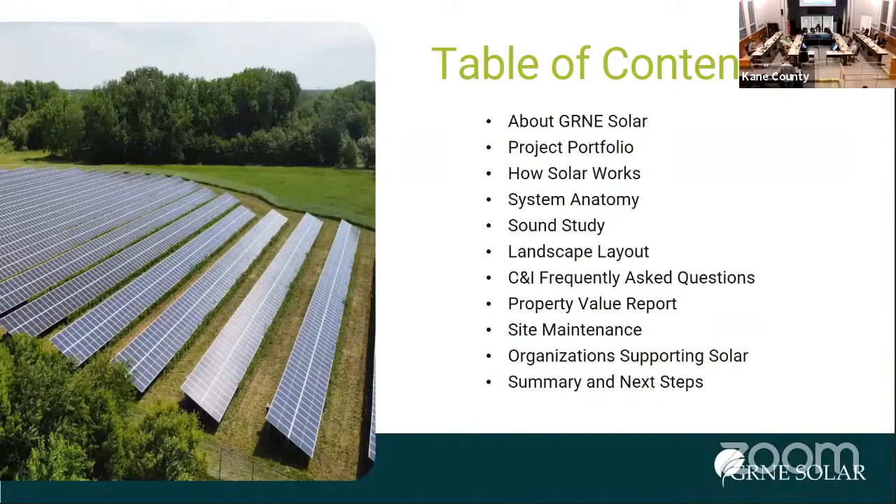I mentioned I'm with GRNE Solar. Next year will be 10 years in business, which is very exciting because although that doesn't seem like a long time for a company, in the solar industry that's an eternity. We are based in the Midwest, with offices in Illinois, Indiana, Iowa, and Nebraska. We operate all the way from the residential sector, putting solar panels on people's homes, up to utility scale projects such as this with governmental entities and municipalities. We do O&M for the life of the service for the PPA agreements we're proposing with this product, and we've built a team that is well-versed and known as experts in the industry, speaking at different conferences or panels to make sure people are educated on what solar is.

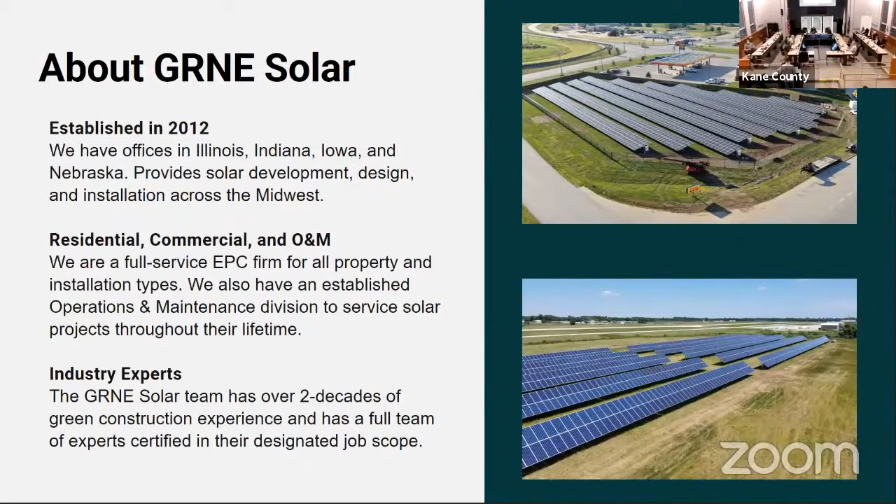The two projects we've done nearby are the Kendall County project and the Fox Metro project. They are almost identical in scope to what we're talking with Kane County about here. These were completed last year, and these fields are operational and are currently saving money for Kendall County and Fox Metro as we speak.

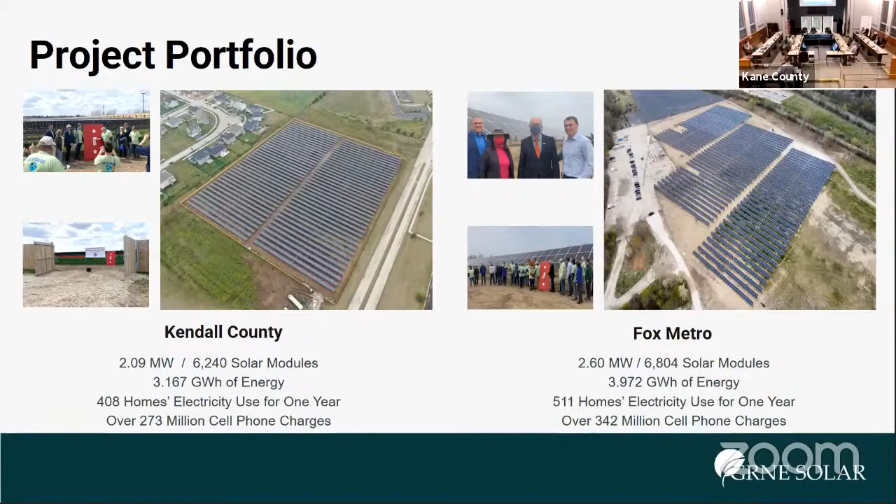Here's a little bit of a portfolio of other projects we've done. As I mentioned, we focus on the Midwest. This project is in Arlington Heights, Illinois, for a private customer, but we've done this type of project for private customers, public customers, and all different entities in between.

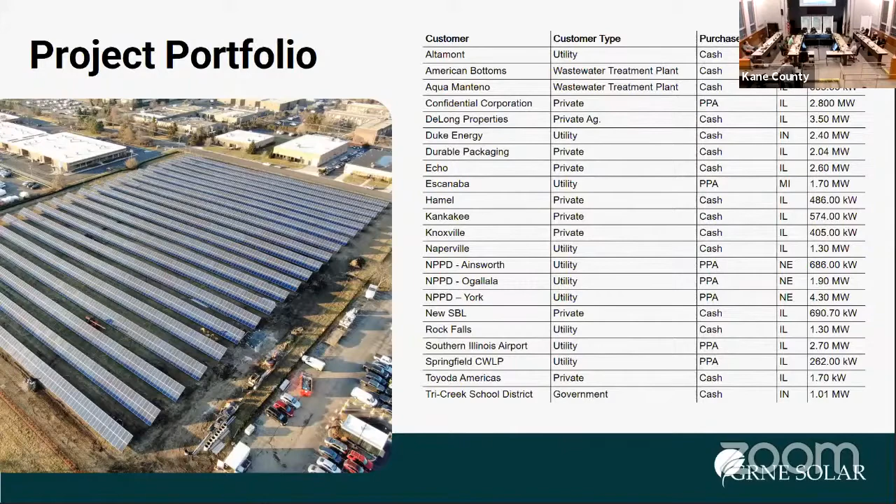One thing we always like to take time to do is step back and explain how solar works. A lot of people know about solar or have some idea of how it works, but it's always good to set the ground level. In this example, you can see solar panels on the roof. Solar panels can really be located anywhere as long as they have direct access to sun. The sun hits the solar panels and knocks around electrons, making energy.

That energy is created in what's called DC, direct current energy. That comes down into step 2, to an inverter, which then changes that direct current into alternating current. Most of the homes we live in, including this room, run off alternating current, so that becomes usable energy. That goes into your existing electrical panel and is used at your home for lights or other loads. Any excess energy is then pushed back onto the grid and goes back to ComEd. So the power produced at your home or building is used there, and any excess is pushed back to the grid where you're getting net metering credits from the utility.

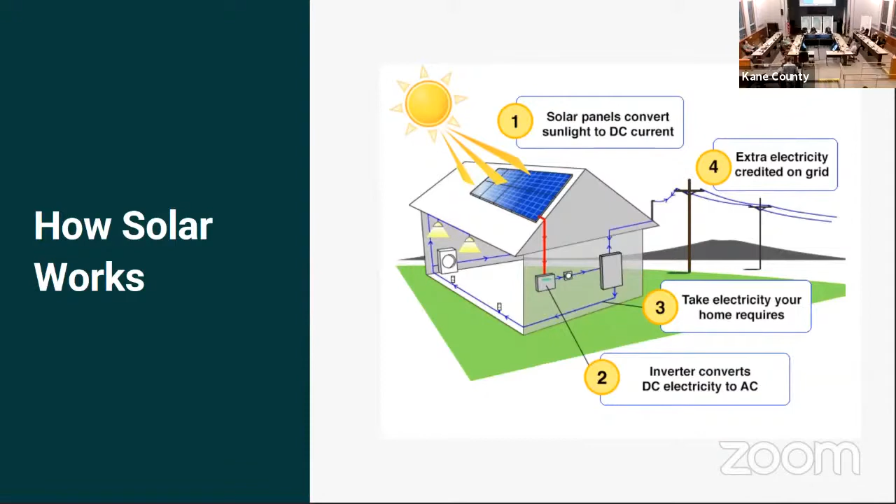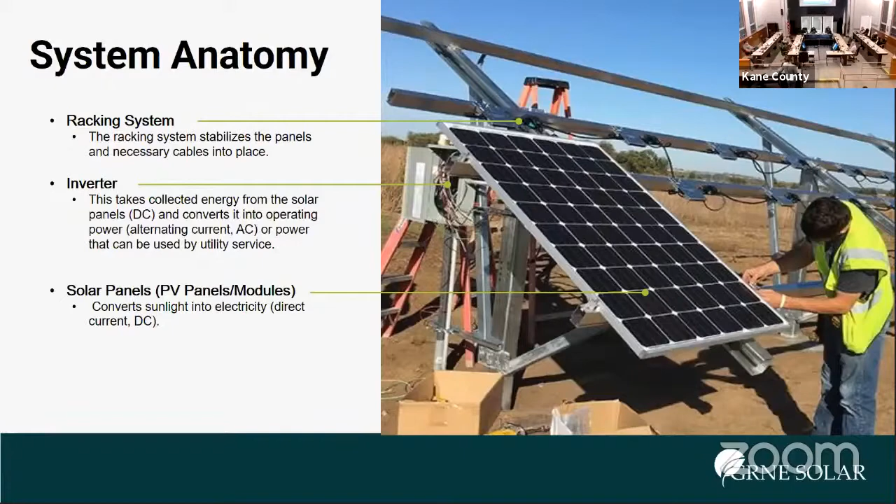Here's a look at what a typical installation might look like. First, you'll see the racking in the back, made of steel and aluminum—that's the support structure. The inverter here, as I mentioned, is kind of the brains of the system; that's what converts DC to AC. Then the solar panel here is located with direct access to the sun, letting the rays hit it, absorb that light, knock around the electrons, and create the energy that becomes usable.

Dissecting a solar panel to see what's inside of it. I actually brought one today. If anybody wants to see one up close, it's in the back of the room. Feel free to stop by and check it out.

There's an aluminum frame on the outside, a double pane layer of glass, the solar cell itself, which is made up of sand, silicon, and ingot, and then a glass protection on the back as well. A junction box protects the wires, and the electricity that runs through those leads into the existing electrical service of your home or building.

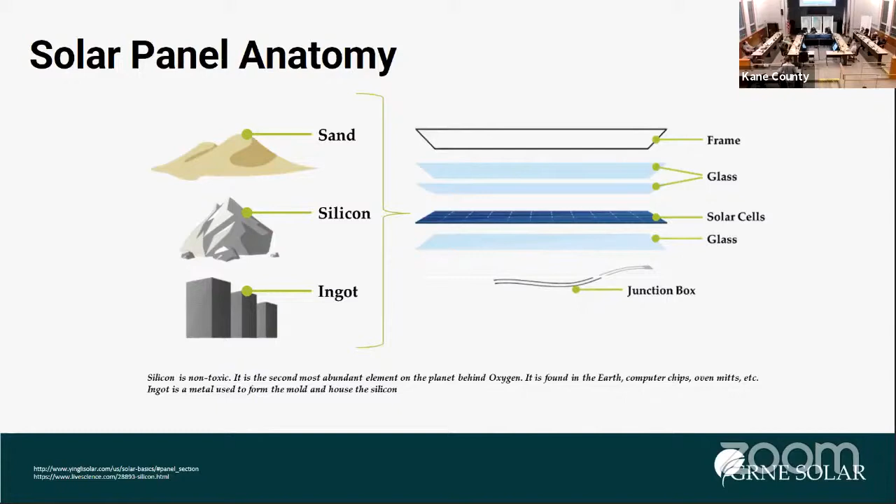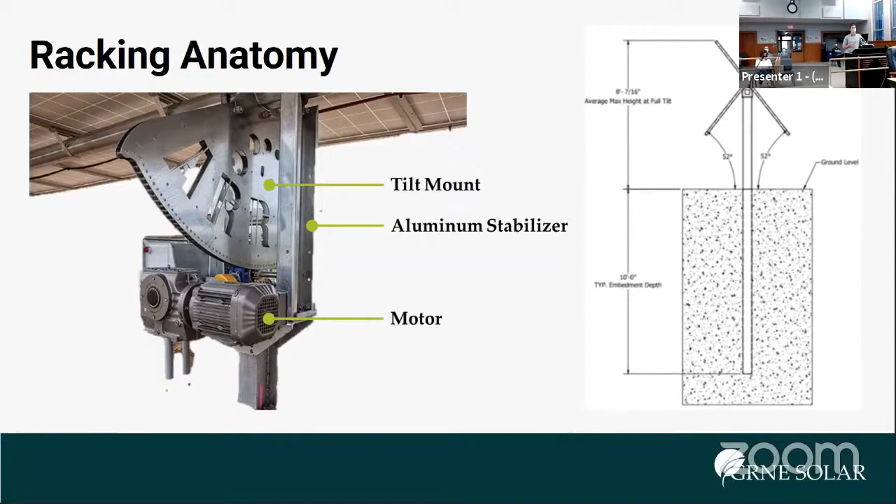On this project, there will be 16 inverters spread throughout the array—that's what's planned as of now. 16 of these white boxes. They're about 2 feet wide and 3 to 4 feet tall. They'll sit inside the array, mounted on the racking structure.

Any other questions on the inverters? Great question—is there any sound that comes from them? That's a great lead into the next couple slides, so I'll answer that as we move forward. Same question, same question—great, it means we're on track then. The questions being answered are on the slide deck. Anything else? Great.

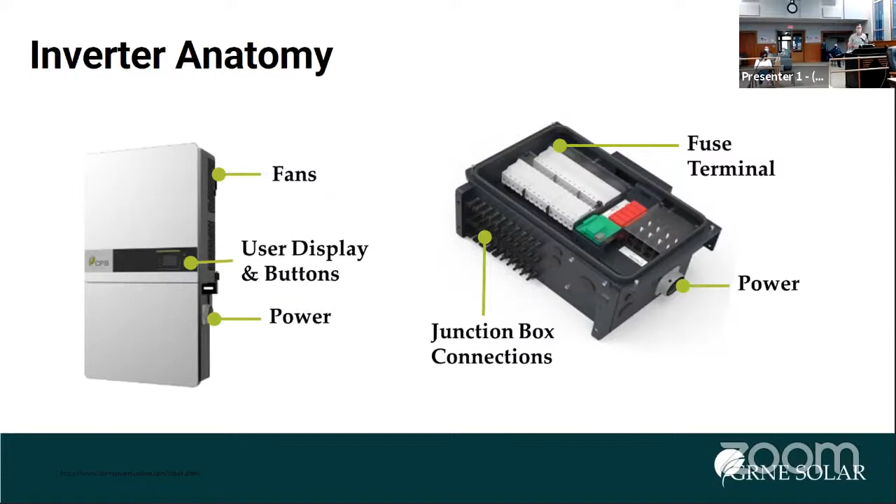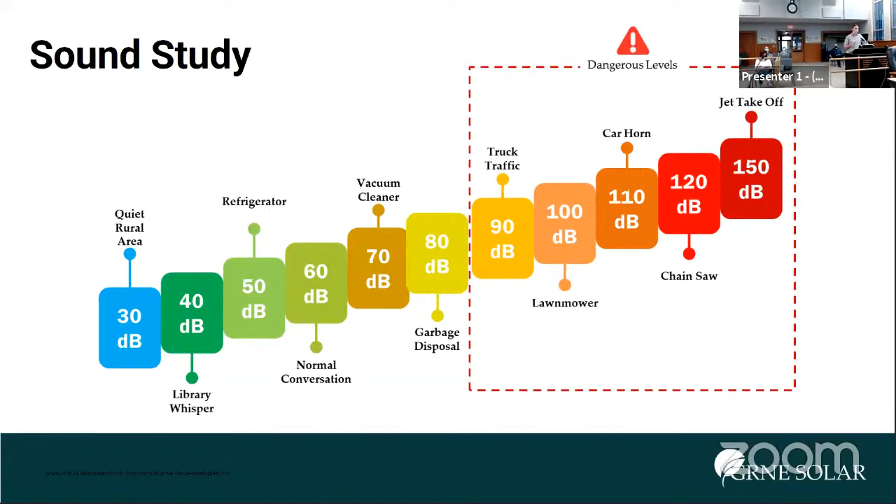Sound. I am not an expert in sound, but this is a scale from an expert showing typical decibel levels. Starting from the left, a quiet rural area is 0 to 30 decibels, a library whisper is 40 decibels, a vacuum cleaner is 70, and as you get into the upper right it's categorized as dangerous levels—car horn, chainsaw, and up by a jet or airplane taking off. This is just a reference for decibel levels, which will help set the stage for how solar impacts that. Solar panels themselves don't make any noise at all.

You can see the solar panel in the back of the room—when it's operating there's no noise from the solar panel itself, so that's 0 decibels. For the trackers and racking material, the manufacturer's study shows that when operational during peak time of day—and these only operate when the sun's shining, not at night—the motor itself runs about 40 to 50 decibels. The motor runs only at 15-second intervals, about every 10 minutes of the day. It kicks on for about 15 seconds, moves the solar panel slightly, then shuts off for 10 minutes, then kicks on again for another 15 seconds.

Question: do they all run simultaneously in the same field, and how many will there be? Good question. For the most part, yes, they run simultaneously. They'll be off slightly based on where they're at, east to west in the field, and they're all run off of an algorithm—they start with the east and then move themselves to the west, but generally they'll all run about the same time. Motors on a field like this will probably only be 4 or 5 total. The nice thing about this racking system is that one drive motor connects to a long drive shaft that actually turns all the rows at the same time.

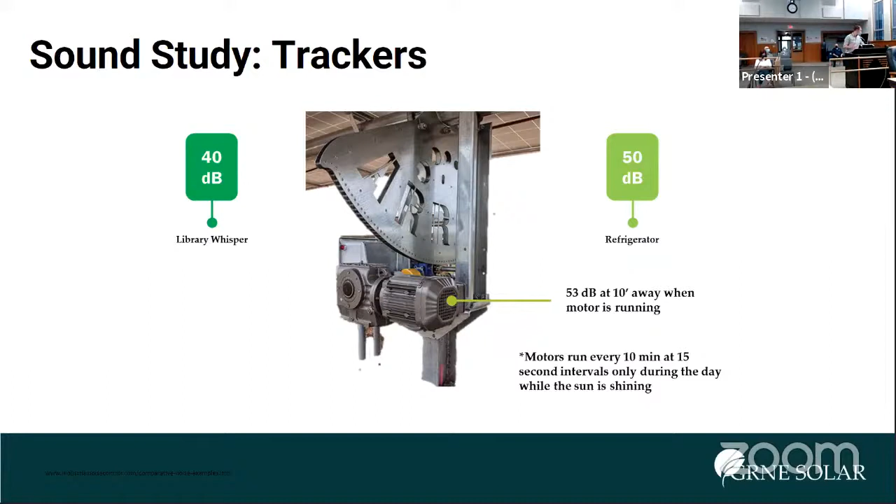The fans are the main noise coming out of the inverters. The inverter, as a reminder, is what creates energy from DC to AC. Inside that box is the electronics we saw broken down, and on the side you can see some of the fans. This was also taken by the manufacturer for the inverter, and in front of it, it's about in the 60 decibel range, like a normal conversation, within the 5 to 10 feet range.

How many fans are there? I believe there's about 4 within each inverter - you can see 1, 2, 3, and there's one you can't see here. So about 4 fans per inverter. And how many inverters? 16 inverters total.

That'll be like your laptop fan that runs when it's hot, just keeping the electronics cool inside. These will only operate at peak times during the day. Even when the sun's shining, up until about 10 a.m., they're not going to be running at full capacity, so the fans won't be either. Only between probably 10 and 2 will you have peak capacity for the inverters and motors, when electricity is being generated.

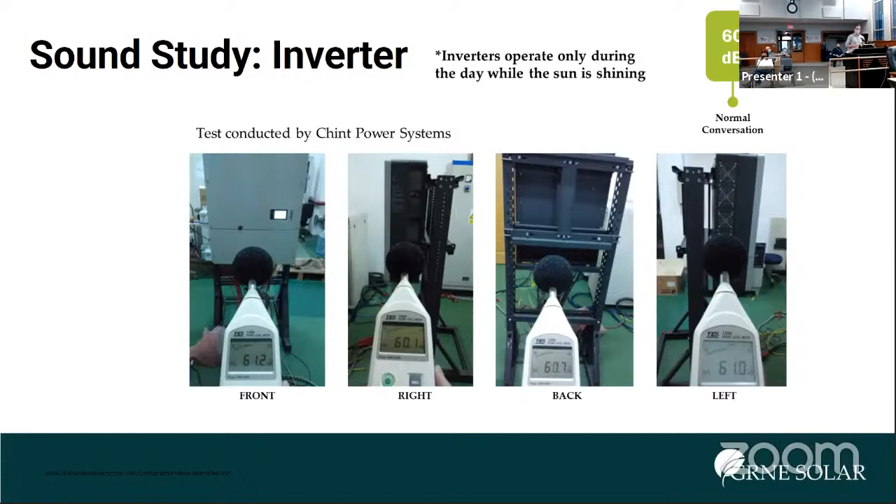Only where the fencing will predominantly be visible will the fencing be upgraded to aluminum or wood, so mostly on the south side. Just to quickly touch on this, this is a cross-section image of the 3810 Ridge Pointe Drive view.

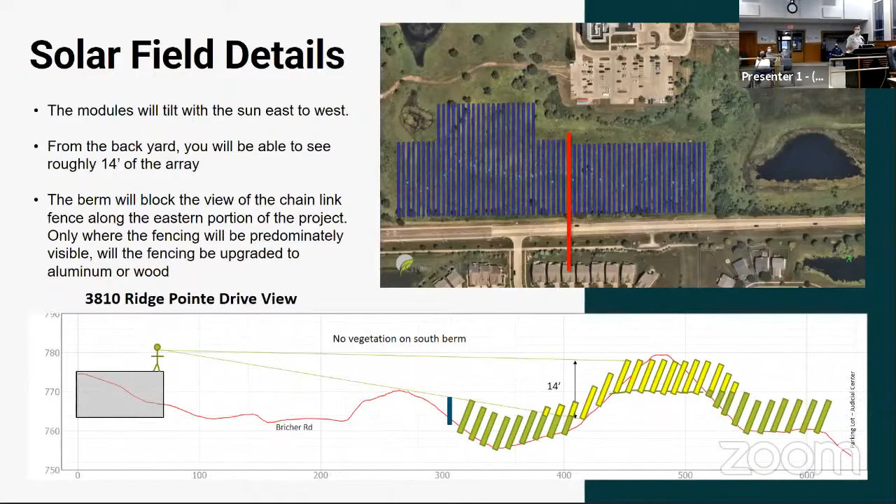So the picture on the left, I met with some residents of Prairie Ridge subdivision, and we were sitting in someone's backyard. This was a fence across the way, a black aluminum fence on the left-hand side, and it was pointed out by some residents that it looked desirable. Then there's kind of a wooden fence that continues off of that black aluminum fence.

So the fence that is going to go around the solar array, there will be a fence around the entire solar array property. And we're planning to have a chain link fence where the fence is not visible to residents.

Where the fence is visible to residents on the south side of Bricher Road, we are planning to upgrade the fence so that it is aesthetically pleasing. We would love your feedback on what kind of fence would be preferable.

I've heard from some residents that black aluminum is preferred, and there's a picture of wooden fencing on the right-hand side. We still need to get cost estimates on the fencing, but the upgrade will be at the county's cost. We are looking into this, and later we'll address some resident concerns about fencing conditions. So that's just a view of what's currently out there.

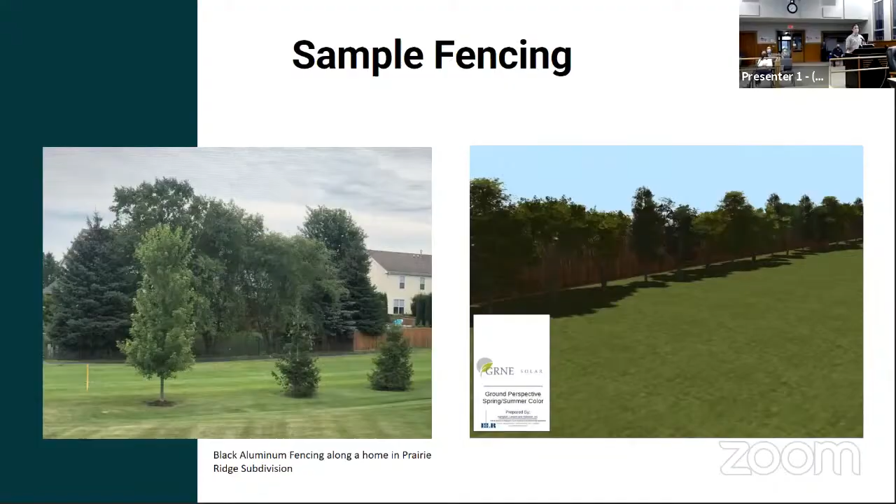Great explanation. Next is site maintenance. Generally one of the questions that comes up is who's going to maintain the site, make sure it's well cared for and taken care of.

That is a responsibility of our company. We're going to own the system, the equipment, the solar system, and lease the land from the county. Anything inside the fenced area will be taken care of by GRNE Solar, making sure the solar field is operating as it's supposed to, and taking care of the vegetation maintenance as well. We have a vested interest along with Kane County to make sure this produces energy and saves the county money, so we'll make sure it's well cared for and producing as it's supposed to.

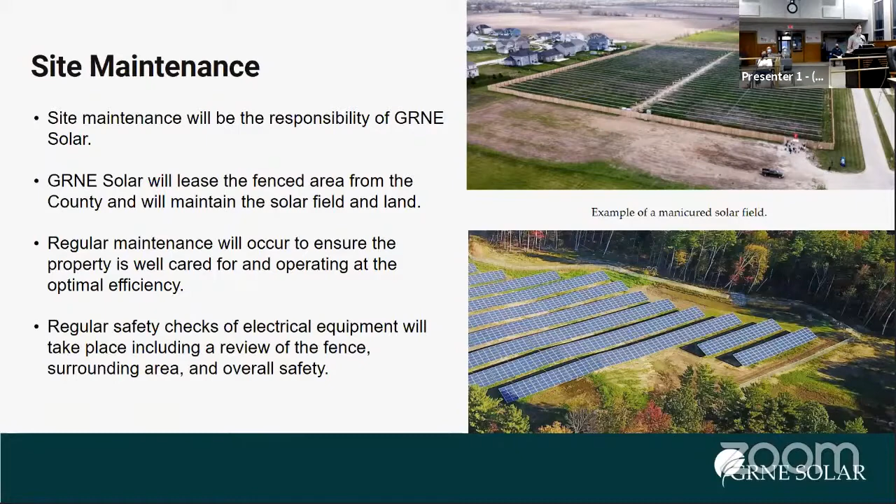Next are a couple frequently asked questions. One that comes up a lot is, will living near a solar field affect the value of my property? A well-known firm, CohnReznick, did a study on this, and the general consensus is that it will not negatively impact property value. There's actually evidence to show it might help the value of your property.

Do solar panels contain harmful chemicals? We showed the dissection of the solar panel earlier and what's inside it, so there's nothing that would be harmful to the environment or harmful if exposed. We covered that one earlier.

Do solar panels create glare? That's actually the opposite of what solar panels are designed to do. As sunlight hits the panels, they're designed to absorb that light and create energy from it, as opposed to reflecting it.

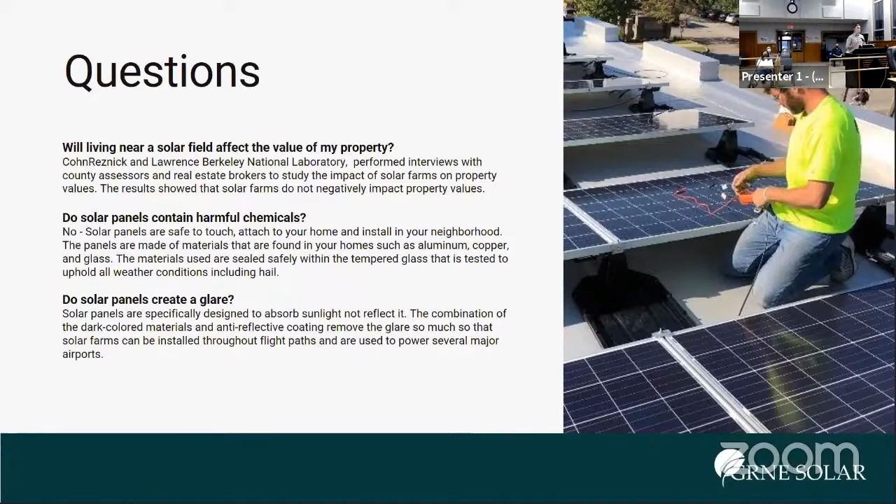Do solar panels leak radiation? No, everything's covered in tempered glass, so there's nothing that comes out of the solar panel itself. Everything is confined within the aluminum frame and the tempered glass, both on the front and the back.

Do solar panels produce electromagnetic radiation? Not any more than a TV or a refrigerator. The levels are actually lower than those normal household devices.

Question: is that comparison for a single panel or for the whole field? Yeah, that's for the whole field. So the entire field would produce less electromagnetic radiation than the equivalent of TVs or refrigerators in a normal home. Are you saying equivalent to one TV? About 4,800. The question was whether one solar panel is equivalent to one refrigerator, and the answer is that it's the entire field compared to one refrigerator. Good question. Anything else?

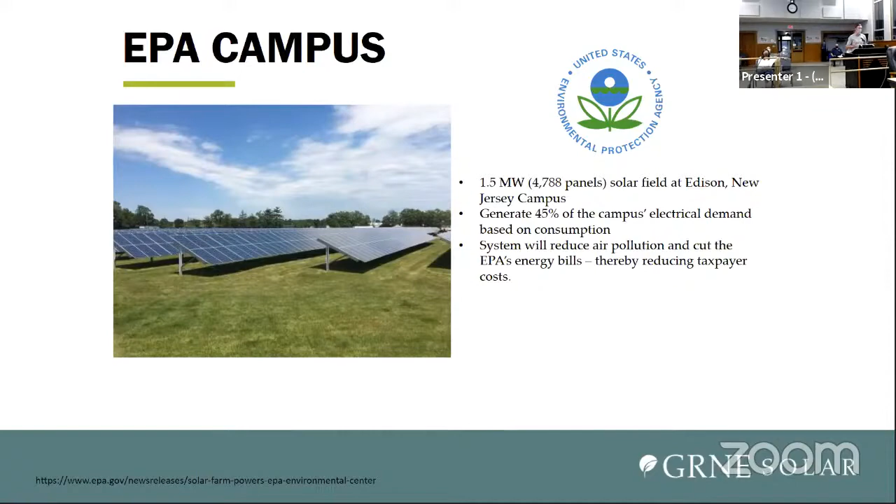This is the last slide for me, I believe, and happy to continue to answer questions.

A few of the main things we covered: solar inverters, which are the box that creates the energy from DC to AC, and the racking motors will be located at least more than 300 feet from the nearest home. The inverters and racking motors will operate only during the day when the sun is shining. The emitted sound from the system will be drowned out by the distance, and we have some landscaping and fencing included as well.

The solar field will be maintained by GRNE Solar. We went over the property study showing no adverse impact, and the environmental groups we talked about as well. We're very excited to help save the county about $4 or $5 million over the course of this project, at $0 capital cost to the county and to the taxpayers — only savings and no capital cost.

A couple of the next steps for if you'd like to follow along with this project. Ivy, do you want to speak to those? Yeah, I can jump in. So just some next steps in the timeline for this project.

We have this meeting tonight to talk to the Homeowners Association of Prairie Ridge Subdivision. On Wednesday, we're going to have an additional Energy and Environment Committee meeting to talk more about this project. There will be a different presentation, so feel free to join us for that. That will be this Wednesday at 9 a.m. in this room, and you can also attend via Zoom. There will also be a recording of that meeting on YouTube.

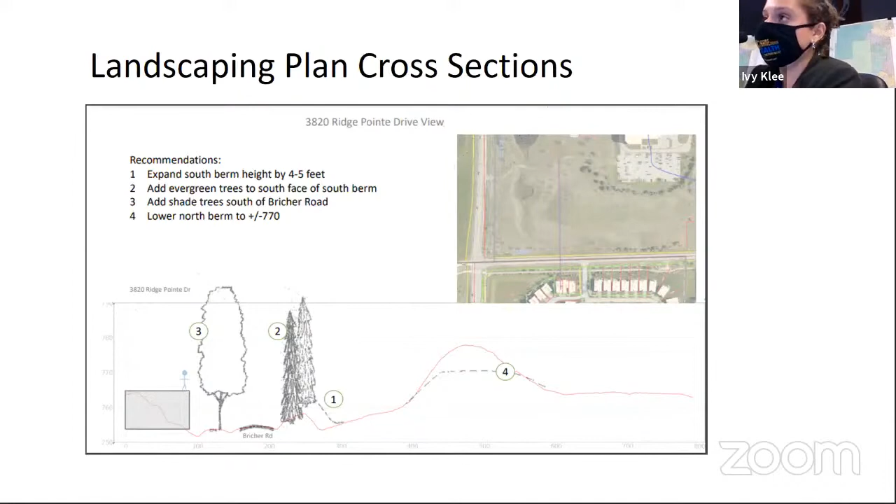And then add evergreen trees to the south face of the southern berm, as you can see depicted there. Add shade trees to the south of Bricher Road, and then lower the northern berm to 770 feet. The red line is where the berm is currently at, and the black dotted line is where it will be leveled off to. They're going to push the soil, flatten it, and push it out. So that's our first cross section.

We have another cross section, 3810 Ridge Pointe Drive View, and you can see how the picture on the right-hand side changes. There's a red line, hopefully you guys can see that. That's the viewpoint of the third house from Ridge Point Drive View, the turn in off of Bricher Road.

This cross-section recommendation is to add evergreen trees to the south face of the southern berm, add shade trees to the south of Bricher Road, and then lower the northern berm to 770 feet, as depicted by the black dotted line.

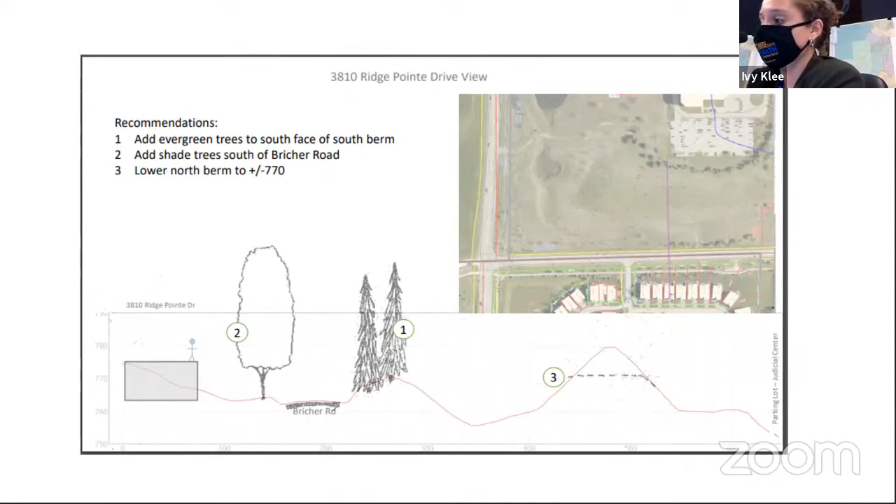And then we have the last cross-section image, which is 3802 Ridge Point Drive view. On this property viewpoint, the northern berm is very low in elevation, so the only recommendations they had were to add evergreen trees to the south of the southern berm and add shade trees to the south of Bricher Road. So you can see there are different landscaping recommendations based on different viewpoints within Prairie Ridge subdivision. These are just some example drawings that we wanted to share with you all today.

So this is the proposed landscaping overview plan that they created for us, and this is an overview including those cross-section images and recommendations that I just showed. This is an overview site, looking over the property and also the homes across the street. We've been quoted an estimated cost to the county of $50,000 for this landscaping plan. It is a proposed plan, and we are currently still working with Wight and Company on this plan.

So you can see in this image there are shade trees on the south of Bricher Road—there are 12 trees, shown in light green—and then there are darker shades of green trees on the north of Bricher Road, and there are 20 of those. Those are the evergreens.

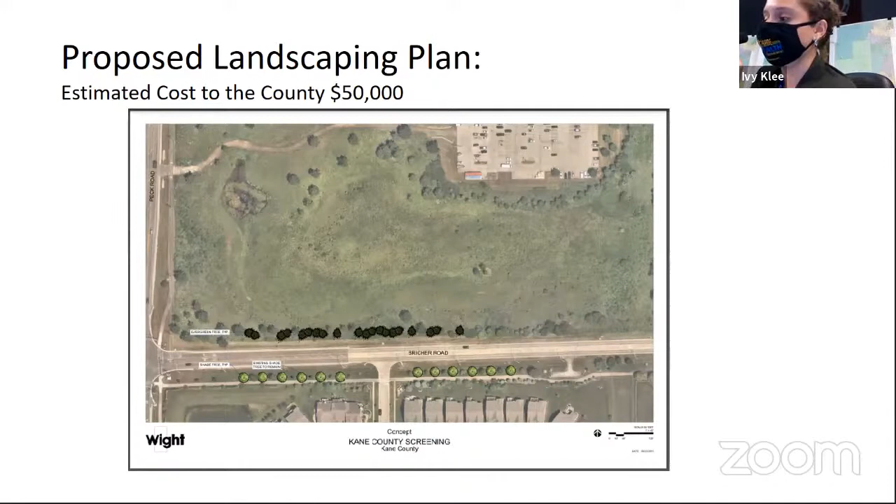You want to take a question, Ivy? Oh, sure. Yep. Question? Question?

Yeah, how big are those trees gonna be when they get planted? Or will we wait 25 years to see their growth? So the planting—I have that information right here, let me find my notes.

Okay, so I believe, hang on one second. I mean, obviously, they're not to scale on the pictures. Yeah, no, they're not to scale. I have that information, one moment.

Okay, so the planting size. The evergreens, which are the darker shades of trees, are going to be at their planting size, 10 to 12 feet in height. They're in that range. They recommend planting them no closer than 20 feet on center so they'll be able to reach their full mature size. The recommended evergreen trees are Norway or Colorado spruce, and their potential mature height would be 40 to 60 feet in height and 25 feet wide.

The shaded trees they've recommended are swamp white oak, shingle oak, and chinkapin oak, hopefully I'm pronouncing that right, I apologize if I'm not. Their planting size will be the same 10 to 12 feet in height when first planted, and then their full mature potential growth would be 45 to 60 feet in height and 50 feet in width. According to the landscaping architect we're working with, they estimated 20 plus years for the trees to fully mature, depending on the weather, rain, and anything else.

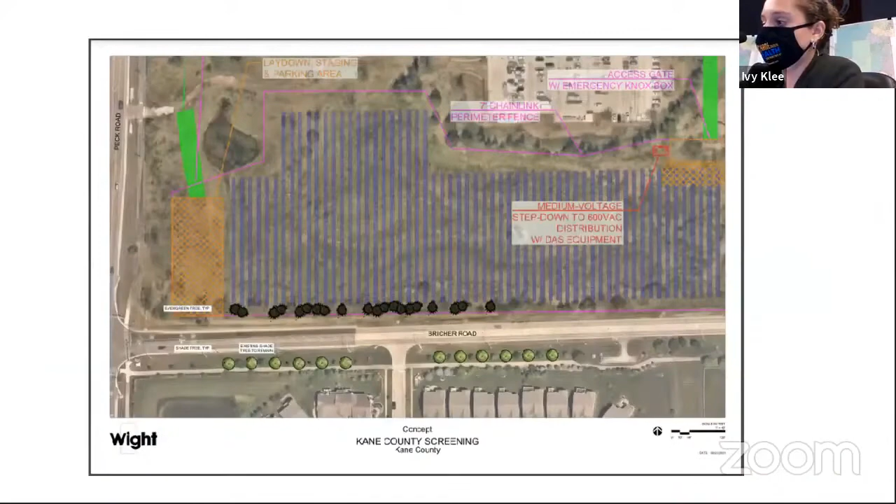Let me go back to this. Okay, so the landscaping, the number 2 tree will be on the south side of Bricher Road, and then the evergreen trees, which is number 1, will be on the north side of Bricher Road. And then the fence will be kind of there, if that makes sense. I apologize that we didn't put it on the map, but ideally we're going to hide the fence right behind the north side of the southern berm so that it is not in the sight line of the homes across the street.

Okay, I couldn't tell by the prior. Yeah, I apologize. And ideally, the fence will not be seen from across the street. Do you have another question? Go ahead.

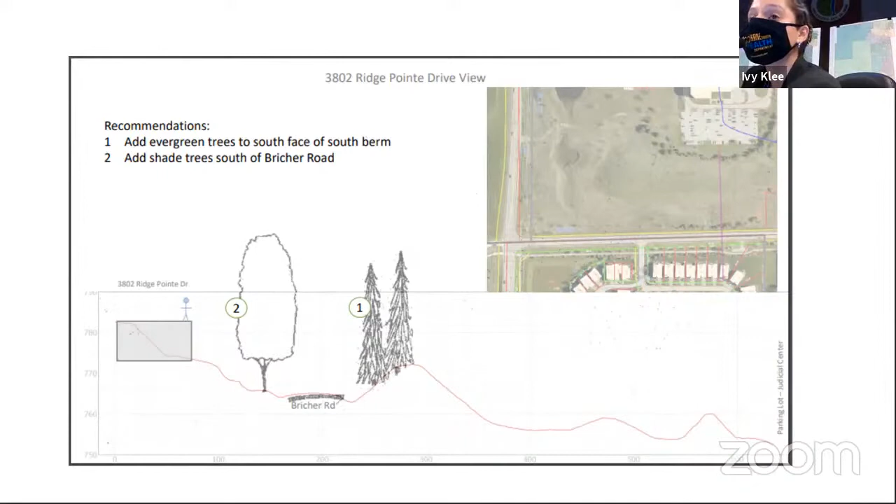A little closer please, sorry, can you hear me now? I feel like the landscaping is not being thought through cohesively for this project, and I really think it should be considered that it does go all the way down and appears to be thought through a little more, versus just doing the minimum, which leads me to the trees on the south side that are existing, which I think are pin oaks that have acorns.

And I don't know who maintains all of that - I'm sorry, I am new to the neighborhood. But that's going to be a nightmare of people trying to ride their bikes with all these acorns falling on their heads at some point. So I just think we need to give some consideration to what type and species of tree is used, to be not only pleasant looking and do the job in terms of screening, but long-term makes the most sense for the property. And that walkway that's there, a lot of kids ride their bikes there too.

Thank you, yes that's a great point. And the first question is, will there be money set aside in case the landscaping isn't successful?

Sorry, can you repeat that? If it doesn't work, if the landscaping really didn't do a bit of hiding what we're going to hide, is there going to be a second plan, or who's responsible then? Because what we're saying now is it should be okay, but we don't know.

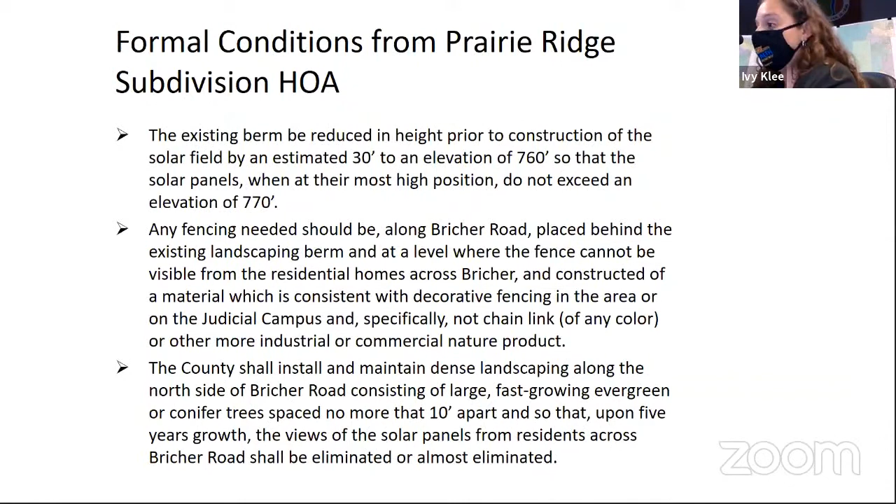So the volume that we would— Ivy, do you want me to just jump in here? Sure, go ahead, Jody. Thank you.

Our Department of Environmental and Water Resources actually runs a lot of project management for large earth moving projects as well, and so we do have a resource within our office of bid tabs from various projects for earth moving. And so we were able in this instance, at the residents' request, to run the volume calculations and utilize our most recent bids for very similar projects to run the numbers to actually reduce the berm to 760.

In total, the volume that we would need to remove from that hill would be 29,000 cubic yards of material moving. Our most recent, very close scope-wise project was the cross-country course, where we utilized significant earth moving of the same volume type. We ended up with a bid price of approximately $18 a cubic yard.

In addition to that, the contractor would need to construct a haul road and also restore the site once that's complete. So if we run those numbers, if we were to try to relocate that spoil on site, we'd be looking at a cost of over $500,000. But in speaking with our building management, they do not have room on the site to relocate all 30,000 cubic yards of material that would need to be moved.